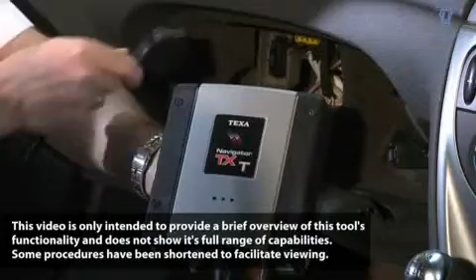We're plugged in via OBD 16 pin. Okay, so the Navigator TXT is plugged in. We can of course put it anywhere on the vehicle because it's Bluetooth wireless. It even comes with a strap so we can hang it from the grab handle. But in this demonstration, so you can see it, we're just going to put it on the trolley. Now I'm going to show you how it works.

Okay, so this is the TXT Navigator TXT. This is the IDC3 Plus software. We've got passenger cars, coverage for bus engines, light trucks and vans, trailers, semi-trailers, and of course trucks and motorbikes. We're using passenger cars, we're going to makes, we've got massive multi-make coverage.

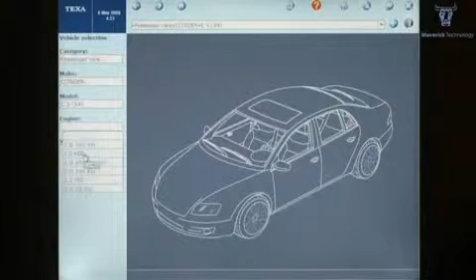We're going to choose Citroën. Again, we've got all the models. This is not so much an auto-detecting system. C5, 2-litre HDI engine, and that engine code. Screen changes.

We can now see all the different systems we can get into: engine management, body control, electrical system, chassis, transmission. If we go into engine management first, we just click on the empty line, choose diesel injection.

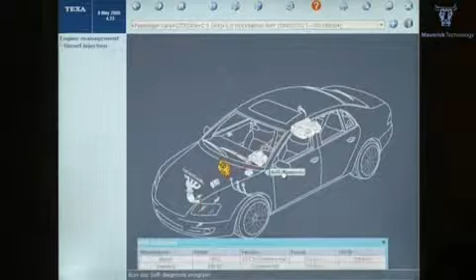Screen changes. We can do self-diagnosis. Choose Siemens engine because we know that's the one that this vehicle uses.

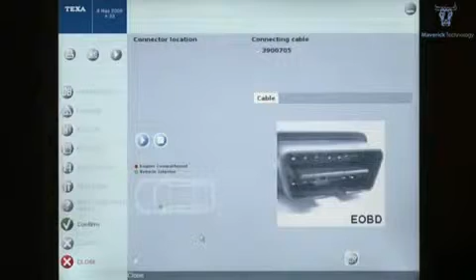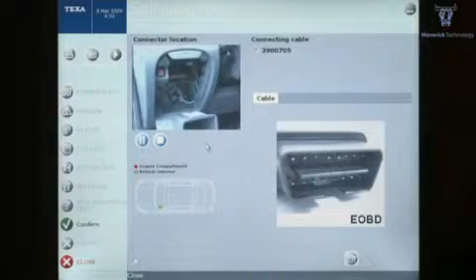We now go through into the connection screen. We get a video of where to connect onto the vehicle, which is a very nice feature on this tool. It can save you a lot of time. It tells you what cable to use, and now we can just press confirm and we'll connect to the head unit via Bluetooth.

And we're connected. The ignition is on, gives you the instruction down here. We press confirm to go into the ECU, and you can see all the instruction, all the capabilities down this side.

So if we go into errors first, which are flashing, telling us there are already errors there, you can see cylinder reference. If we double click on it, you can see the detail down the bottom.

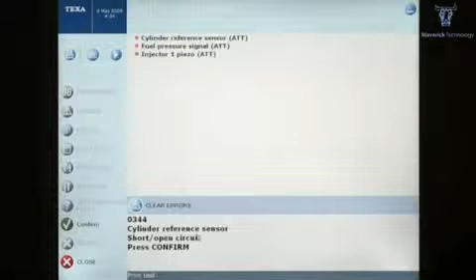Short or open circuit, fuel pressure signal, so on and so forth. We can clear them by just pressing clear errors. Delete errors, press confirm. You can see in a second the colour will change to green, which indicates that they've been cleared from the vehicle and they're now just stored here, STO, for our reference.

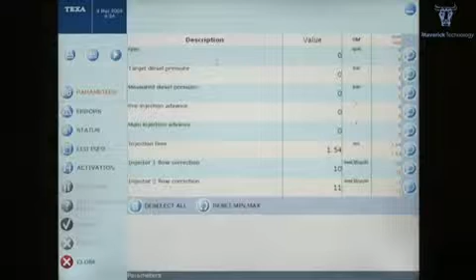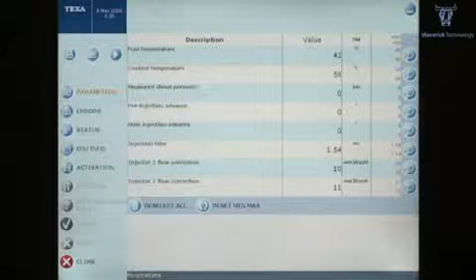We go into live data very quickly. Nice clear screen, we can see 8 items at a time. The vehicle isn't running at the moment, but at any time we can change this screen by just clicking on the end of any one of the lines, and then on any particular ECU we can change any item to what we want to see. So it's completely interactive - you can change the screen to whatever you want.

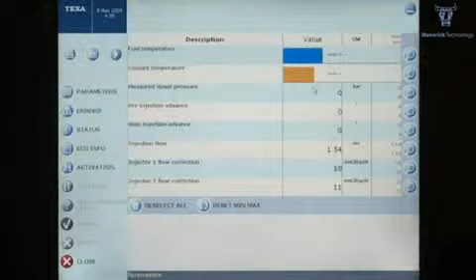If we want to see them as little built-in graphs, we can do that. Of course, those will change as the items fluctuate. We can change them back again as we wish.

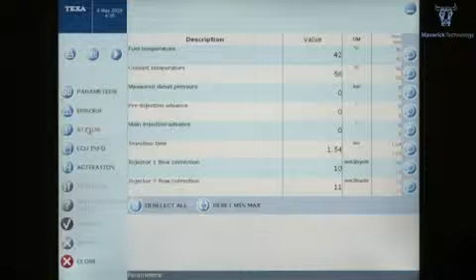So we've done live data, errors. Now we're going to statuses, 0 and 1, on, off, status of components. Again, it's just non-dynamic data, and that's all we can see on this vehicle.

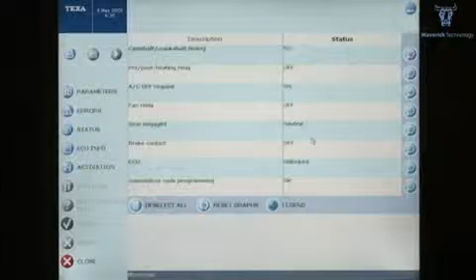ECU info, again, just gives you the reference numbers and the coding information from the particular ECU.

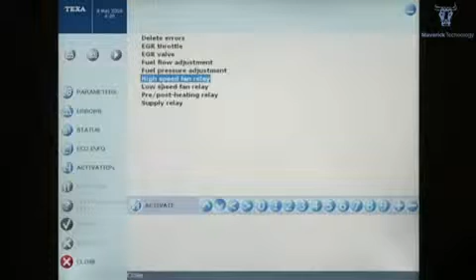And activation of components. If we wanted to, we can activate the high-speed fan - we choose that, press activate. The instruction comes down below, telling us to switch on. The high-speed fan's running, cancel to end.

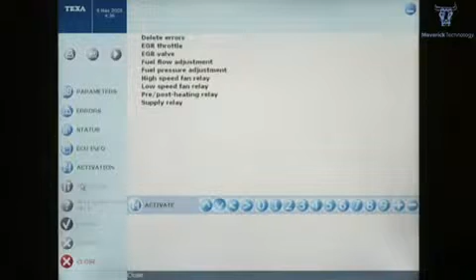We can run anything else we like. These two are grayed out at the moment because that's settings and programming, and on this ECU there's nothing we can do. So we come out.

We're back to the screen we were before. We go back a page. We go into the body controller, for instance, on this vehicle.

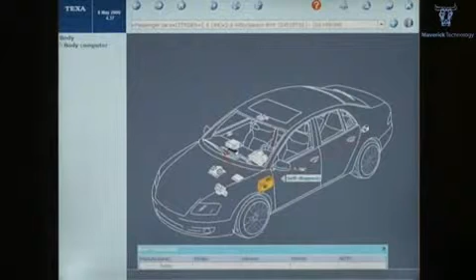Again, self-diagnosis. Go into the connection screen again. We don't need to wait, you can just press confirm straight away. We're connecting again via Bluetooth to the head unit. We're in, it's opening communication, turn the ignition on, press confirm.

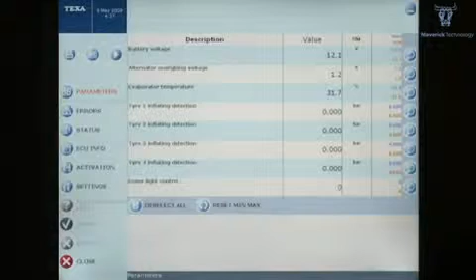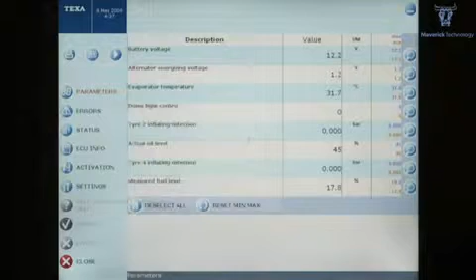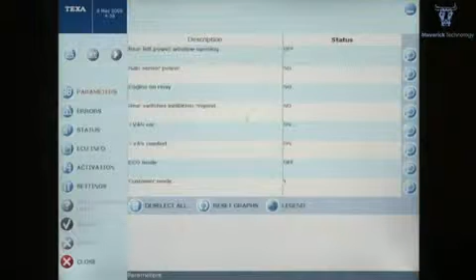Okay, and again we can look at live data in the BSI. There'll be loads and loads of live data on this vehicle, as you can see. We can look at anything we like, change anything we like, as you wish. But again, where it comes into its own, we've got error codes - there are no fault codes found. Status of components, is something on, is something off - again, you've got a huge list. So we can see the status of any component of the vehicle and what state it's in.

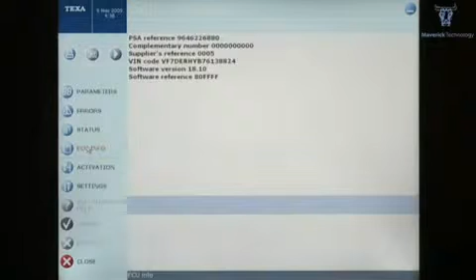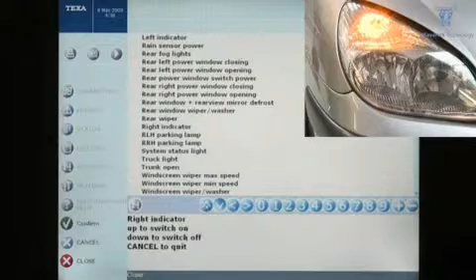Then we've got ECU info, again all the supplier references. Activation of components, so we can run those windscreen wipers, we can do the indicators. Here's the windscreen wiper washer activation.

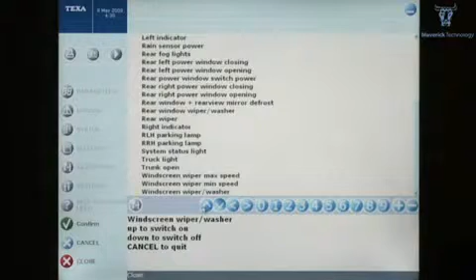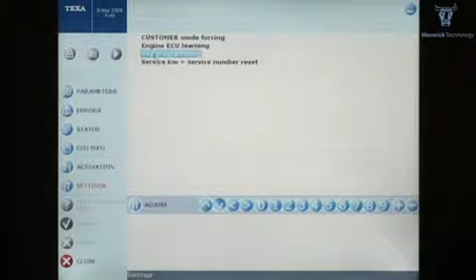This is where we can do some programming with the TEXA - key programming, engine ECU learning, customer mode forcing. Altogether an all-round excellent tool.

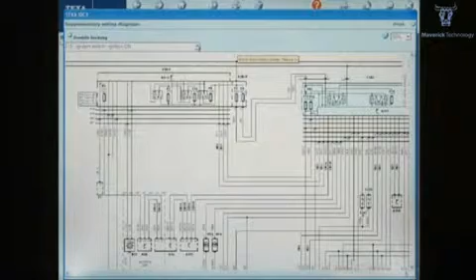The other thing that's very important about the Navigator Mobile TXT is that, of course, you've got wiring diagrams. I'll just take you into a central locking wiring diagram briefly. You've got all of this information built in as well, which is sometimes very, very difficult to find, and it's all in the one tool. If you want to find out where a component is, where's the ABS control module, it will flash and tell you. There it is.

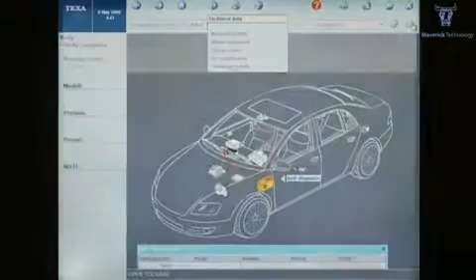You've also got mechanical data - wheel alignment, tyre pressure, air conditioning data. So mechanical data, injection system, tuning and emission data, starting and charging data, all sorts of data. This is where this tool really wins. Service interval and scheduled maintenance data as well. If you weren't sure on this particular vehicle what you should be doing at a particular service interval check, you've got the same data available to you as the dealer would have, and you can use it as a check report.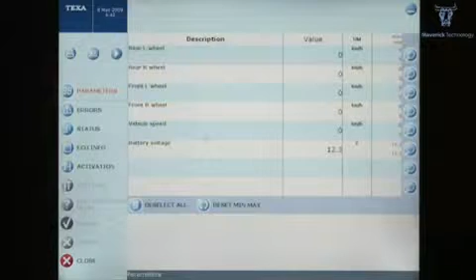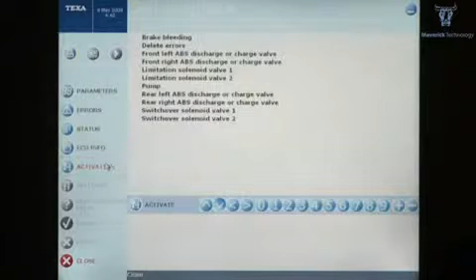So now we're in the ABS, live data, we should be able to see all the wheel speed sensors - here they are. The vehicle's not moving, obviously. Errors, there won't be any. Status of components, whether they're on, whether they're off. ECU info again. And of course we can activate the pump, brake bleeding, etc.

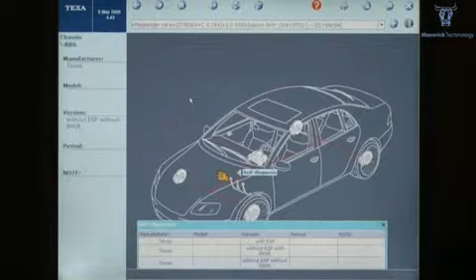So that gives you a brief overview of the TEXA software, which runs on its whole family of tools, from the TXT to the TXT Pad to the Tribox and the Axone 3. And the thing to remember, this not only has diagnosis for cars, it has it for trucks, commercial vehicles, vans and trailers, also motorbikes as well, plus technical information and fantastic support.

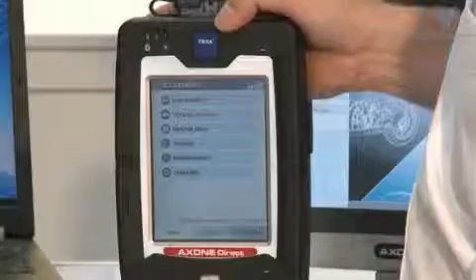Okay, that was a brief demonstration of the Navigator TXT and its capabilities. It can do cars, trucks, motorbikes, it's Bluetooth, it works from laptops, or because it comes from a family of TEXA products, you can control it with this, the very rugged TXT Pad, which can be used as a control unit instead of a laptop in the workshop, or you can connect it directly to the car. And again, it can do cars and motorbikes.

This one is the big daddy of the family, the Axone 3. Again, car, truck or motorbike, but mainly used by the truck industry because it's very, very rugged, very hard wearing.

Last but not least is the TEXA Tribox. This is unique in the fact that we can take out the diagnostic module and we can put back in scope modules, multimeter modules, or even CAN bus analyzers.

That's TEXA, a brilliant range of products, fantastic coverage of vehicles, really pretty much unbeatable. We're really proud of them, our customers love them, brilliant for car, truck and motorbike. If you need any further information, please contact us.